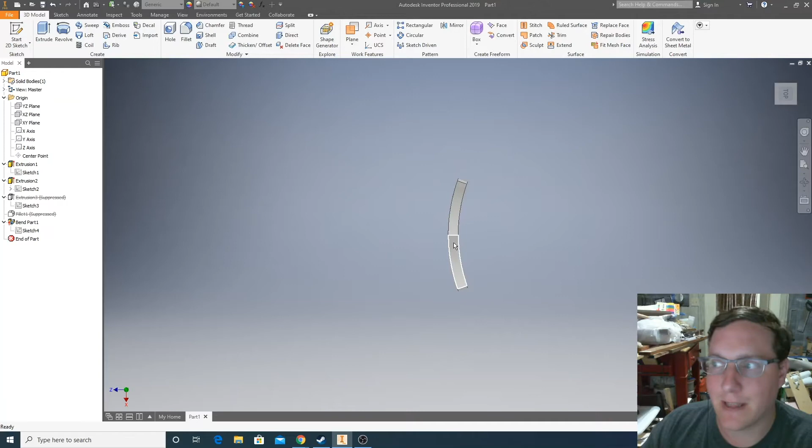with modeling. So basic shield, not a lot of ornaments in this one, at least not in the Inventor version, but I do want to show you at least a couple of tips on how to get that curve in there. So what we're going to do is start a new standard part file within Inventor, and we're going to start off with a basic sketch.

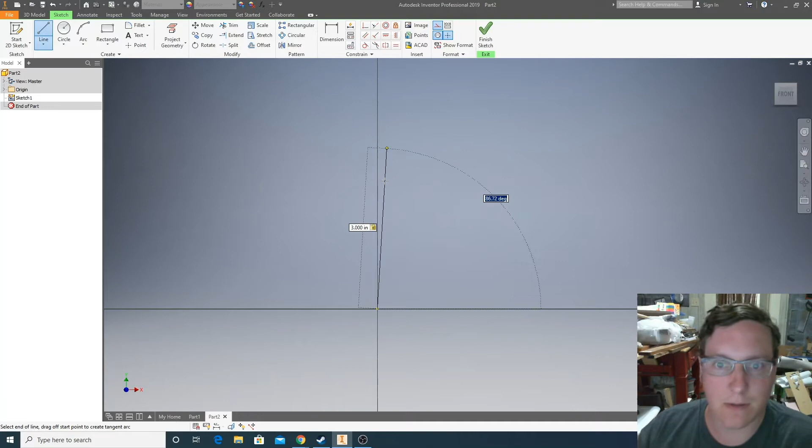But in the basic sketch, the first thing we're actually going to draw is a construction center line, just roughly sizing this 3 inches. So we get the center line. We'll need that for some of the mirroring in a minute. We're going to grab the arc tool to draw a regular kind of hook for the top, and then a second arc to flare it out a little bit.

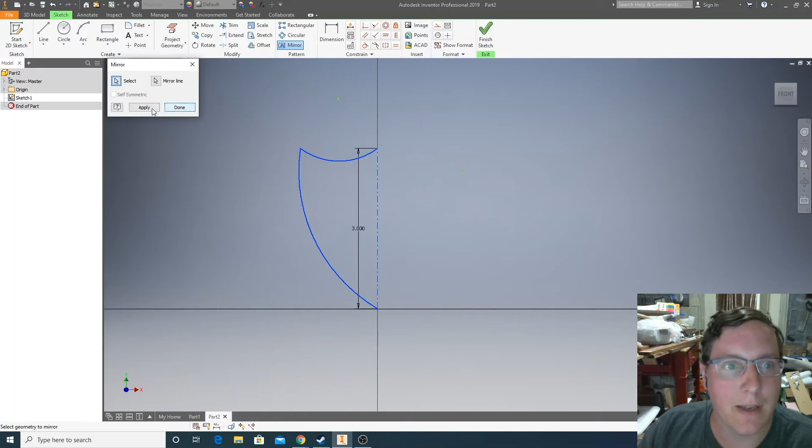You can kind of play around with it a little bit. No dimensions set in this one. But after we have one half set up, to make sure that we're matching whatever we do, we're grabbing the mirror pattern to select the 2 lines that are going to mirror, and then the center line that we set up to create the full shape. Now you can tweak it a little bit more if you want. I'm going to say that that looks fine for me.

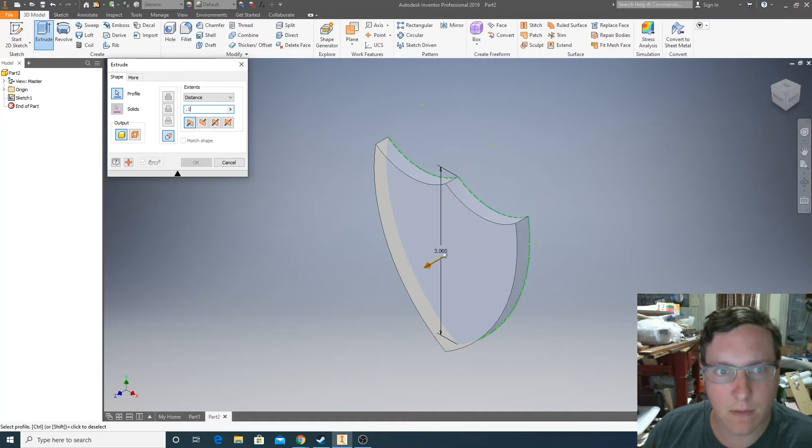So finishing the sketch, zooming back out, doing a small extrusion. Let's try 0.25 inches. Let's bring it back a little bit, because we'll add some thickness to this. So what we're going to do is start another sketch on the surface to create the bevel portion.

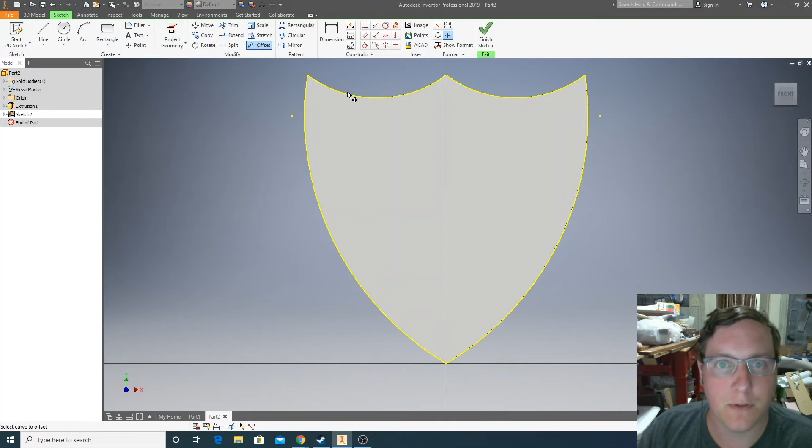Get this zoomed back in, and to do that we're going to project the geometry of the entire shape. We're going to use the offset tool to bring it in a little bit. 0.2 looks fine for me. And then we can finish that sketch and do the extrusion. But actually, because we can do multiple things in the same sketch, I'm going to put in the single character.

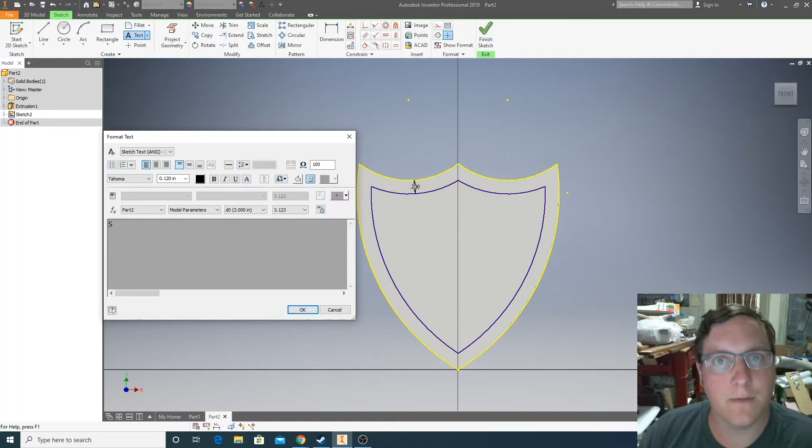Now, one of the downsides of Inventor is it won't automatically generate that. So from what I was playing around with earlier, I had to find a better font, so we'll use the Script MT Bold. We can see that a little bit in the preview, and we know that we're going to need a decent size. So that's going to look all right to me.

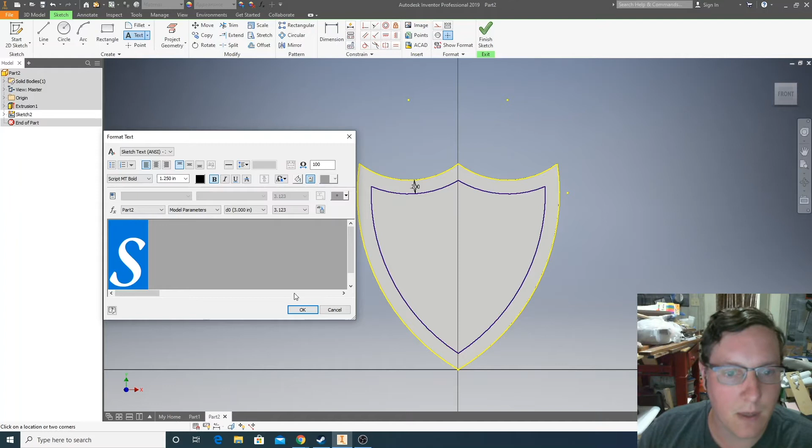Then hit escape a couple of times, clear the tools to loosely place vertical position, and we can use some of the symmetry tools to help us out. So symmetry tool left and right of the character, and then I can go back into my origin tools, hover over them to have it center on the y-axis, where you see it kind of highlighted in white as the center. Then adjust it a little bit to figure out vertical placement. So bring that back up a little bit.

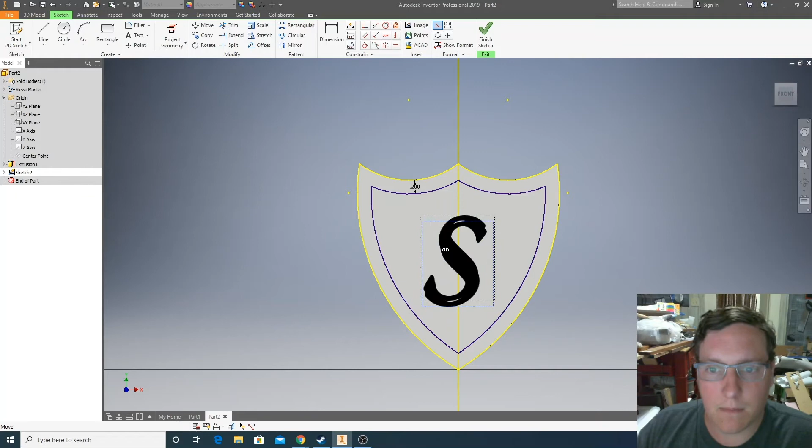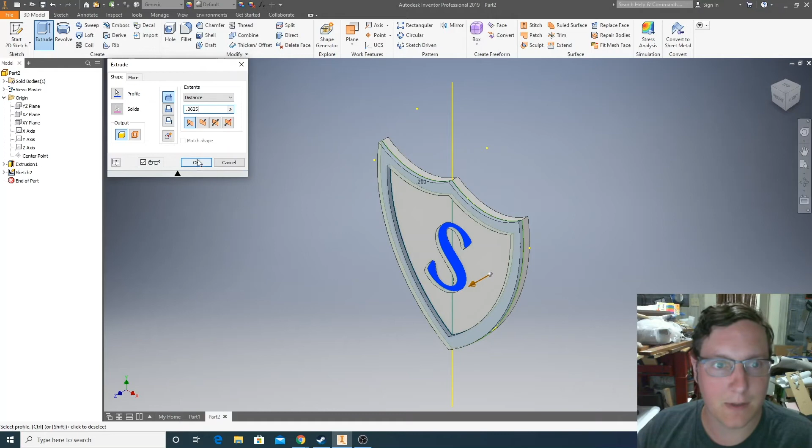Okay. So with the sketching finished, we can do another extrusion, E for extrusion. Select the parts that we want to extend out, so the letter as well as the border that we set up. We don't need it to go out quite the same distance. Let's set it for 0.0625, about 1/16 of an inch. Hit OK. And that leaves us with kind of a flat shield, and that's what I see a lot of students being able to get to.

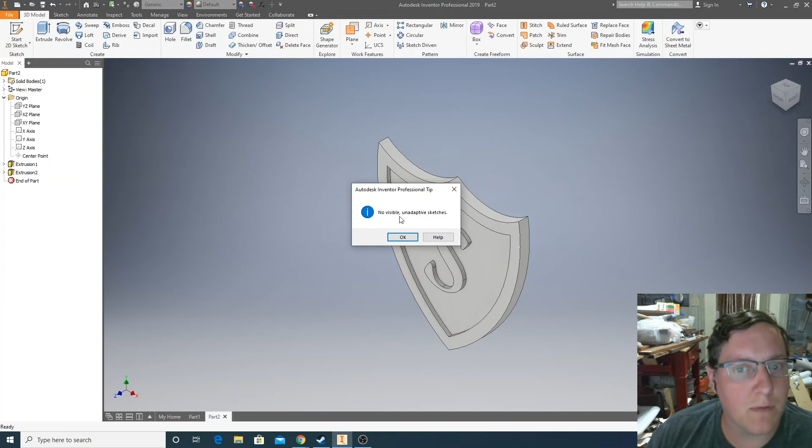But a tool that you may not be aware of is how we can actually use some modifications. And the one that we're going to use is the bend part, but it needs a visible center line, a point where it's going to bend. So to take care of that, we're going to rotate around to the back. We're going to do another sketch, and we're going to do another center line drawing point. Okay, so I've got it just locked down to the anchors.

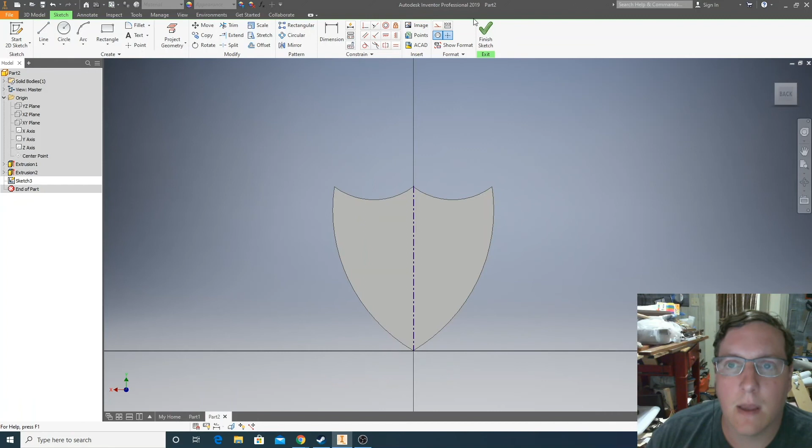Okay. Finish that sketch. We can now go into modify, bend part, and we can tell it first where the bend line is. And we'll look at the top view to see how the bend is being applied. And we can say that we need to have both sides bent, not just one. But then we need to play around with the radius to decide how far we're going to bend that shield.

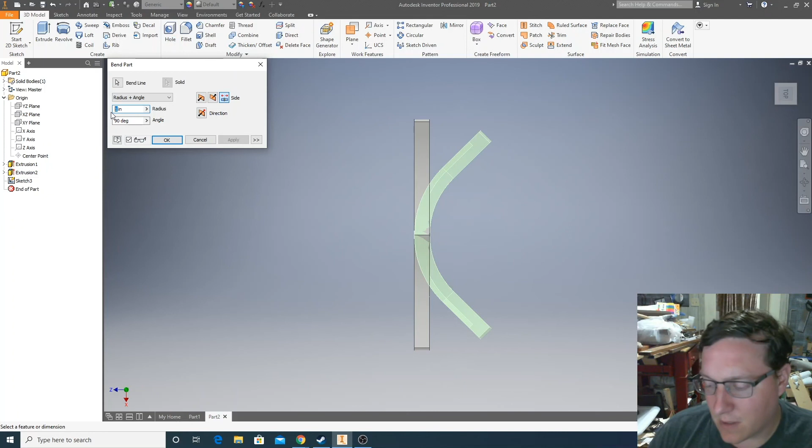In this case, a smaller radius means that we're going to have a smaller bend right there. Larger numbers are going to smooth this out. So let's try 3.5. That's maybe a bit too much. Let's try 2.5. Yeah, 2.5 is enough to kind of give it the dramatic feeling. But the bend tool is definitely a way of giving the shield a bit more of a feature where it's giving it a bit more realism.

So hopefully these tools have helped you out. Again, this was just kind of playing around, doodling, but I know a lot of you are already interested in doing that. So learning more tools is definitely a better way of getting a deeper understanding of the CAD software, and sometimes just playing around is what the people that end up writing books use to give them some guidance.